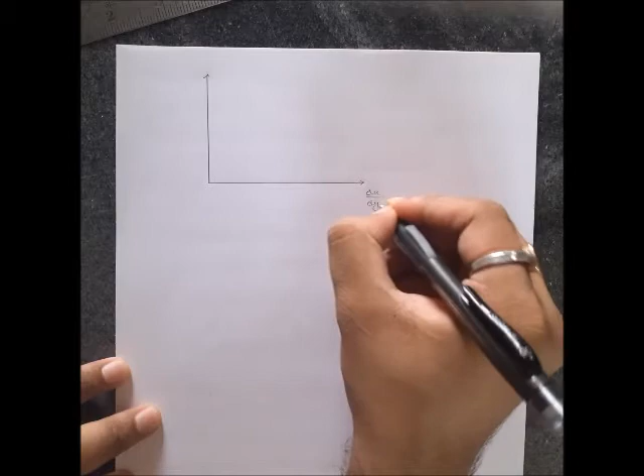We will plot the graph between shear stress and the velocity gradient in case of different kinds of fluids. So the x-axis goes for velocity gradient, and the y-axis goes for shear stress.

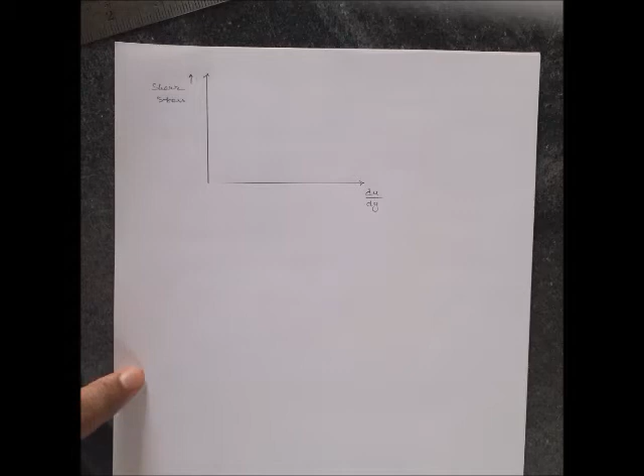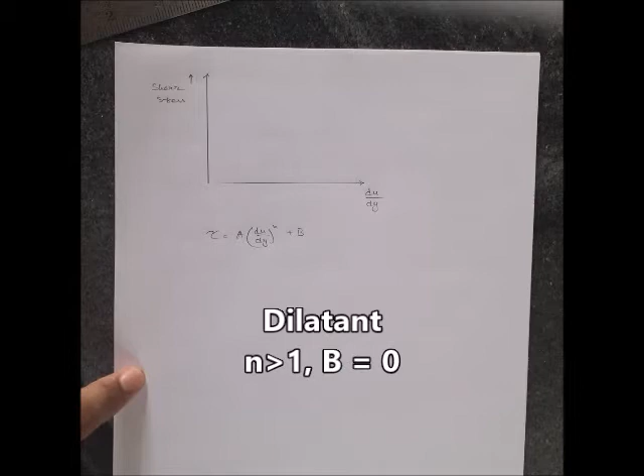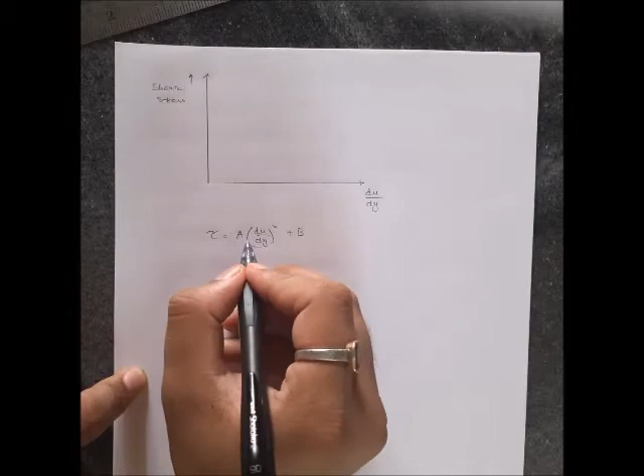As we have seen in the previous video, in case of Newtonian fluids it just follows tau equals to mu du/dy. But for non-Newtonian fluids it's tau equals to a (du/dy)^n plus b. For dilatant, n is greater than 1 and b equals to 0, so it's basically tau equals to a (du/dy)^n, and here n is greater than 1, so it's an increasing curve starting from 0. So it's like this.

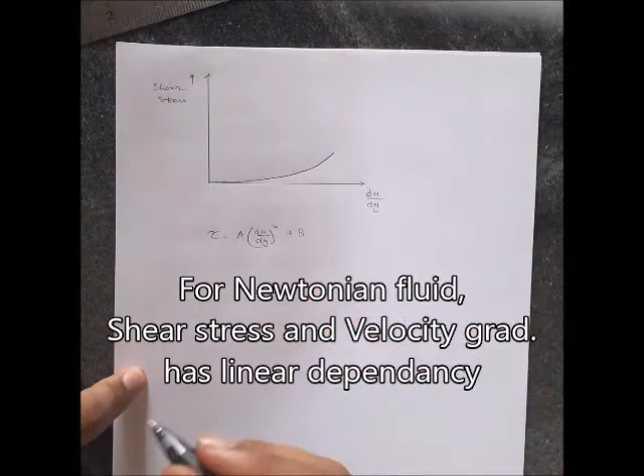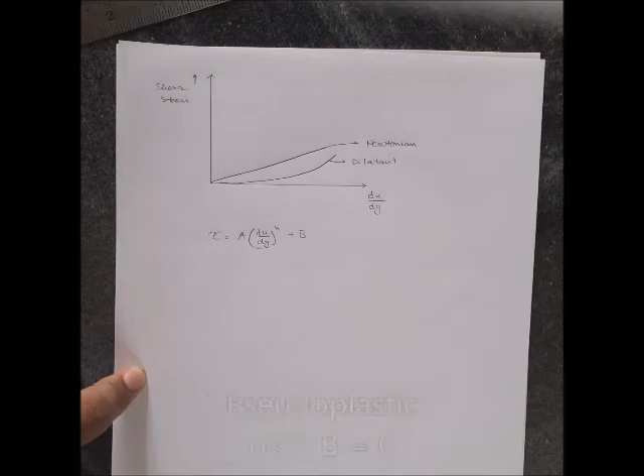In case of Newtonian fluids, it's tau equals to mu du/dy, so it's linearly dependent on the velocity gradient. This is Newtonian. This one is dilatant, then comes Newtonian. In case of pseudoplastic, b is 0 and n is less than 1, so it will be a decreasing curve like this. This is pseudoplastic.

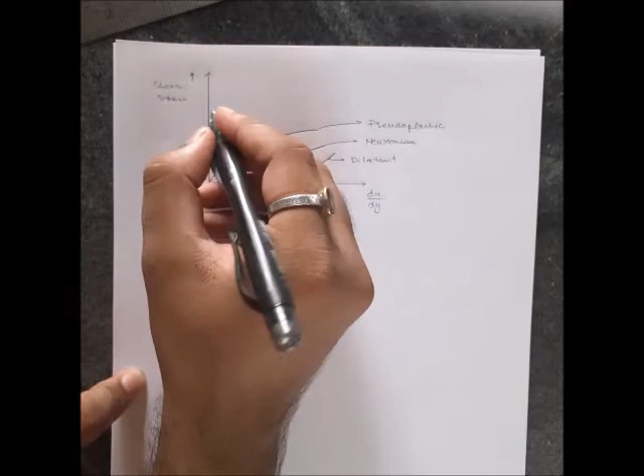Now in case of those materials, as we just stated, for whom b is not equal to 0, the shear stress will start from a certain value. This is called tau 0, or initial stress.

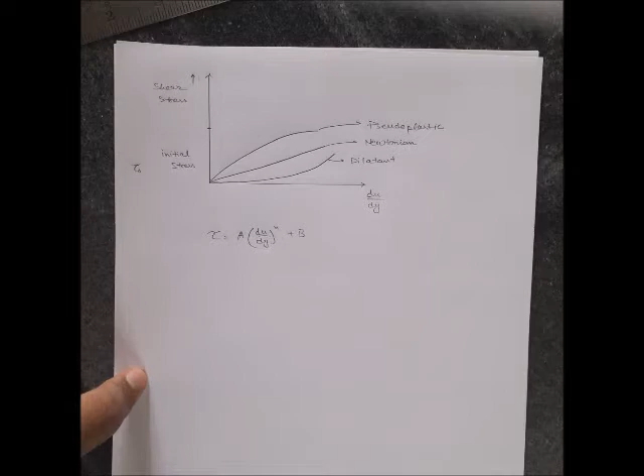Just as we stated in case of Bingham plastic, these fluids always have a certain minimum shear stress before they yield. So in case of thixotropic, n is less than 1 and b is not equal to 0, so it will be like this: n less than 1 gives a reducing curve, but b not equal to 0 means it starts from a certain value. This is thixotropic.

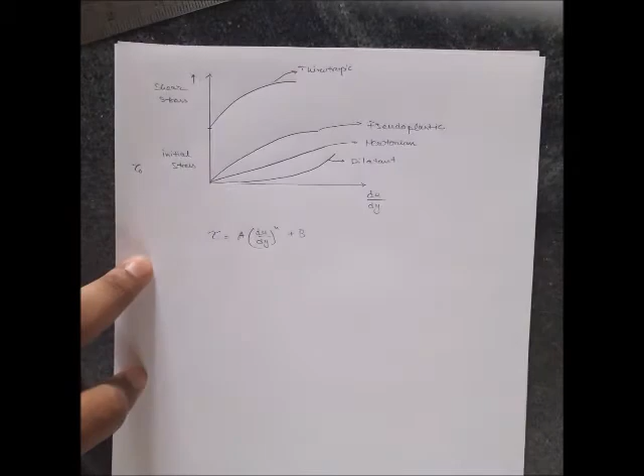And in case of rheopectic, b is not equal to 0, but n is greater than 1, so it will be an increasing curve like this. So this is rheopectic.

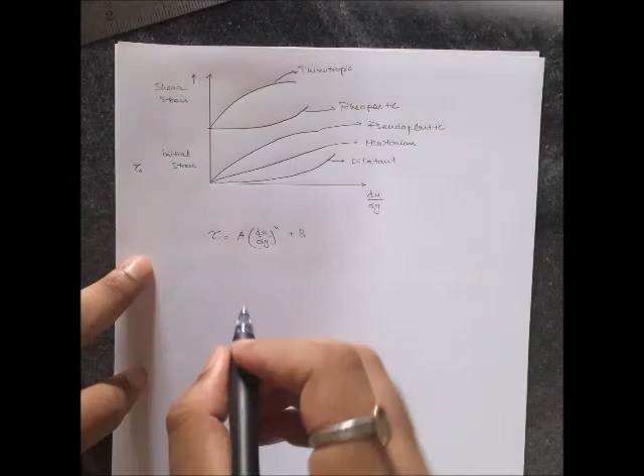And in case of ideal plastic, where b is not equal to 0 but n equals to 1, it will be a linearly increasing curve, and this is called ideal plastic.

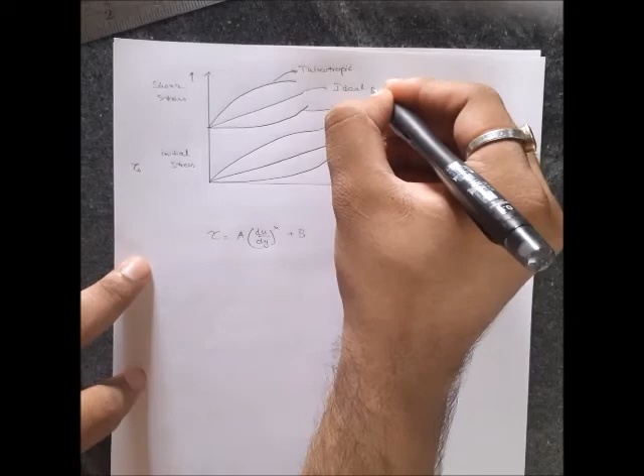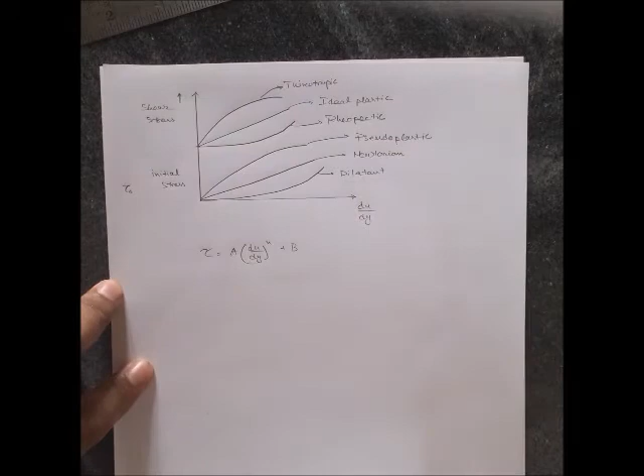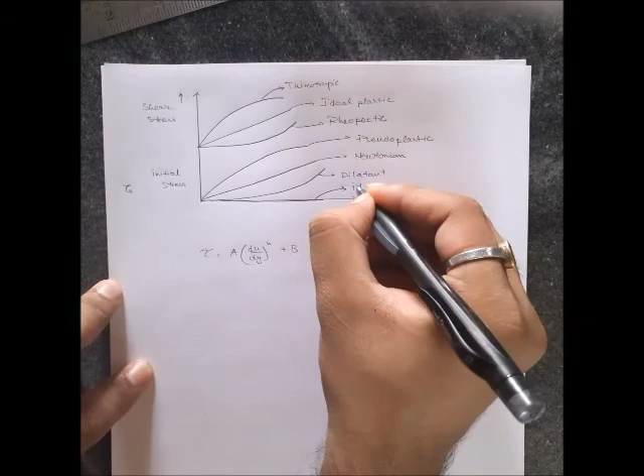And in case of ideal fluid, where there is no internal stress in case of velocity gradient, it will coincide with the x-axis. This is called ideal fluid. Here basically A is 0, B is 0.